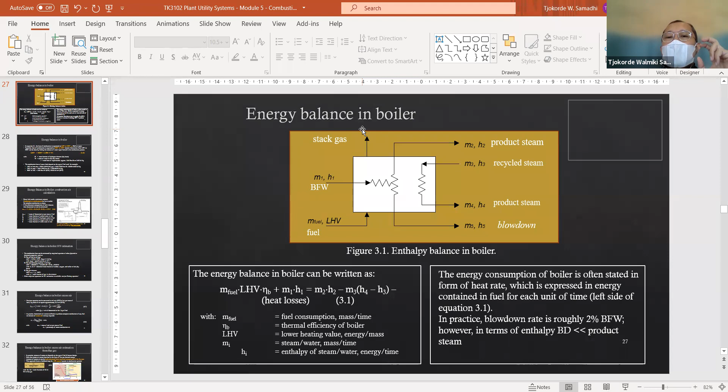Then we will review again how to calculate LHV and HHV. Of course, you guys have learned about the Dulong equation. We will use that again and again in the following chapters, particularly in this chapter, of course.

We will review how to calculate the combustion air, which includes also the excess air. And we will also introduce to you guys one of the most important control loops, which is air to fuel ratio control, AFR.

AFR is an acronym for air to fuel ratio. So in any combustion system, not only boiler, AFR is a very, very critical parameter. So it is always controlled in a tight manner in the chemical processing plant. And the typical way of controlling that is by using a flow ratio controller. So you can regard this as a quick introduction to process control class.

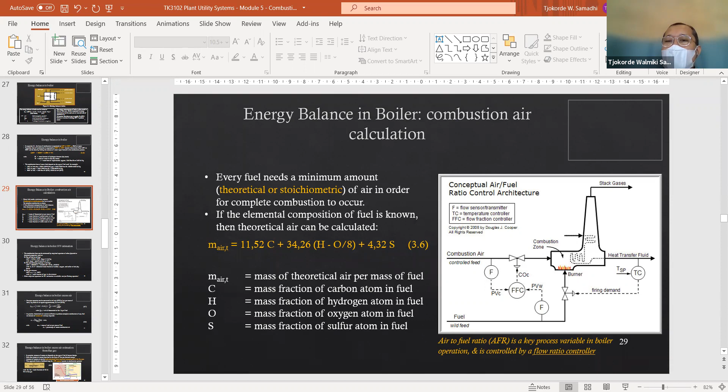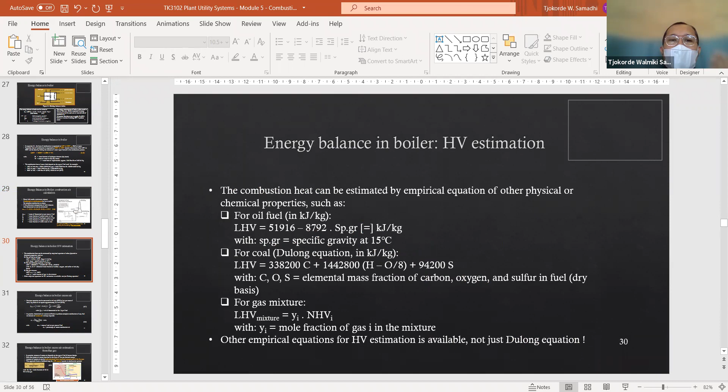Okay, all right. And so this is heating value estimation. You guys are already familiar with this. Excess air calculation - all you have to do is to follow the formulae.

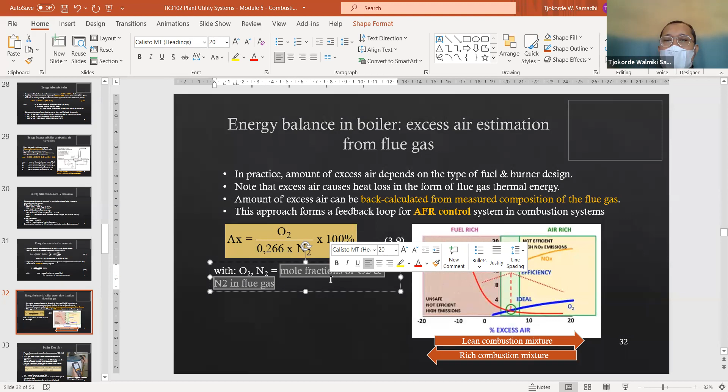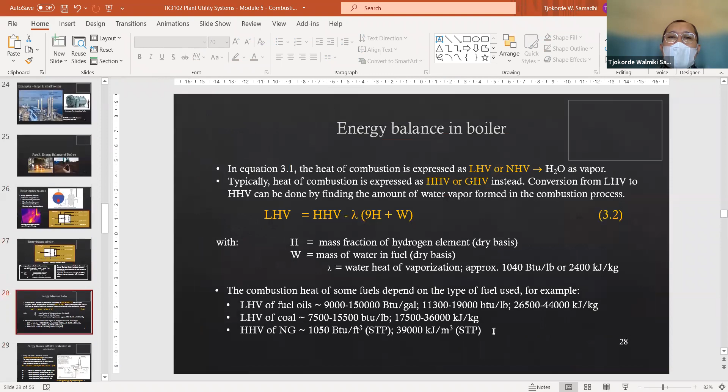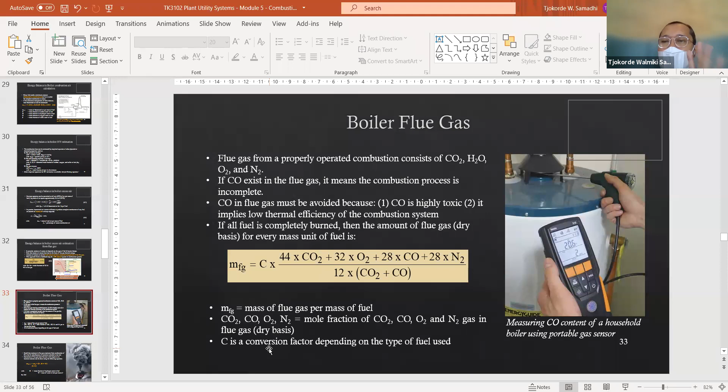That is the reason why we include a dedicated subsection only to discuss an example of how to calculate this boiler energy balance, and that will be done tomorrow. Because this discussion on boilers is supposed to be completed this week, today we will discuss the basic assumptions in calculation, and tomorrow we will discuss the specific example for the boiler calculation.

All right, next: this is for if you guys need to convert the basis of flue gas calculation from dry to wet basis. Remember that moisture in flue gas originates from two sources: combustion of hydrogen in the fuel, and volatilization of moisture that was there in the beginning in the fuel itself. So some fuel already contains water, not hydrogen molecules or atoms, but water.

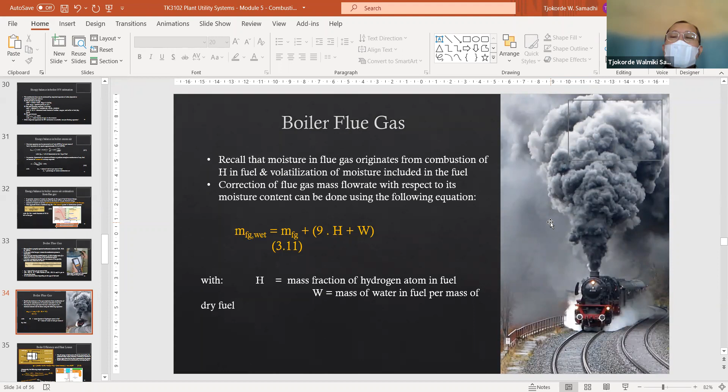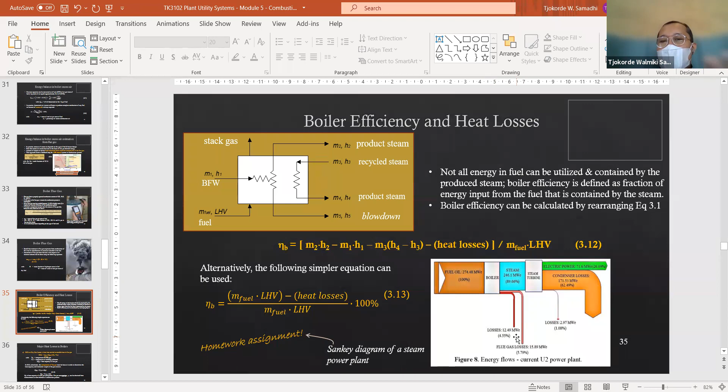Energy transfer to the next stage, and energy lost to the environment, and so on. It's pretty easy to understand as long as you pay close attention to it and review it again and again. Don't just look at it once and convince yourself that you understand what the Sankey diagram is.

I have in the past made an exam problem out of this Sankey diagram, and almost none of my students were able to answer it. I think the problem is that the students didn't really pay enough attention to what the Sankey diagram is and what it tells us.

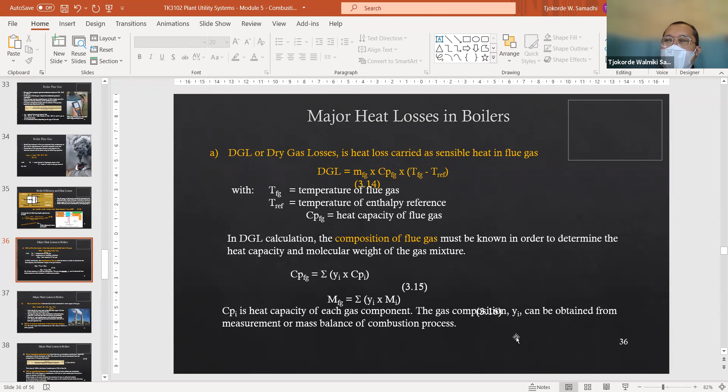It's pretty straightforward. In the last few slides, we discussed the types of heat losses in boilers. The major types of heat losses in boilers include dry gas loss, or DGL, which is one of the most important types of major heat loss. We have moisture loss, MCAL or moisture combustion air loss, incomplete combustion loss, uncombusted carbon loss, and so on. We will close this subsection, this video segment, with a quick note on what are the most important types of heat losses in actual boilers.

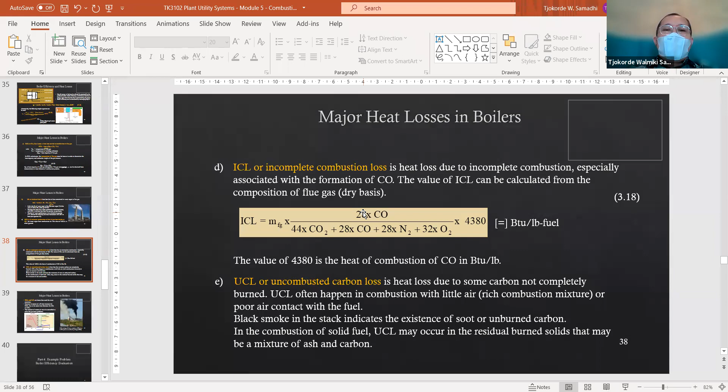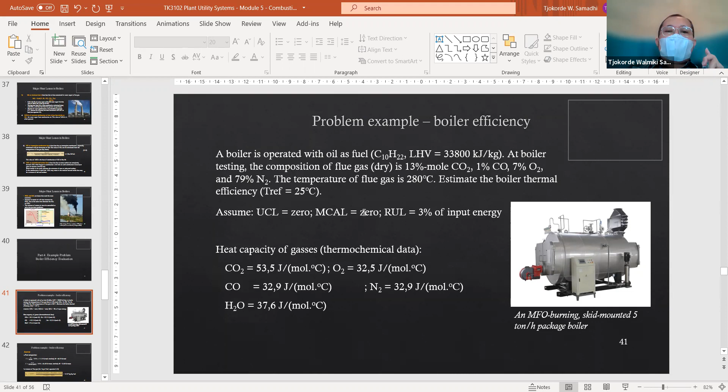Okay, any other questions? If not, we will see how we use these calculations, this formula, tomorrow when we discuss the example. It's highly recommendable if you read it in advance. Tomorrow we will continue to part 4 in this module, which is the example problem of boiler efficiency evaluation or calculation. We will learn how to implement the formulae to calculate the different types of heat losses, and also how to complete the mass and energy balance, and ultimately calculate...

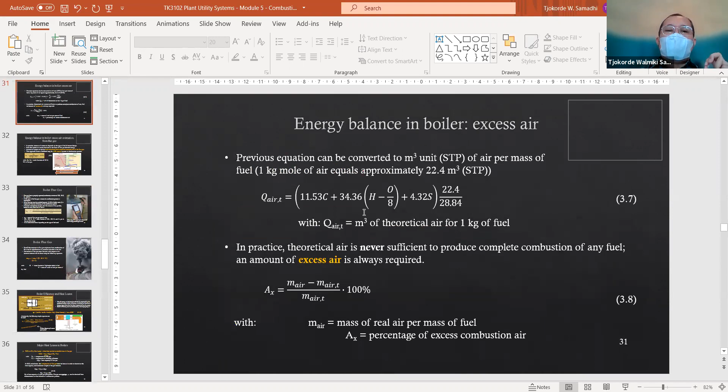Where is it? I'm trying to be dramatic here, but... anyway, geez.